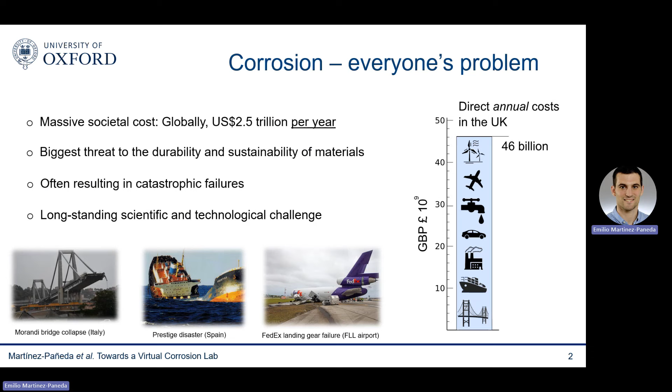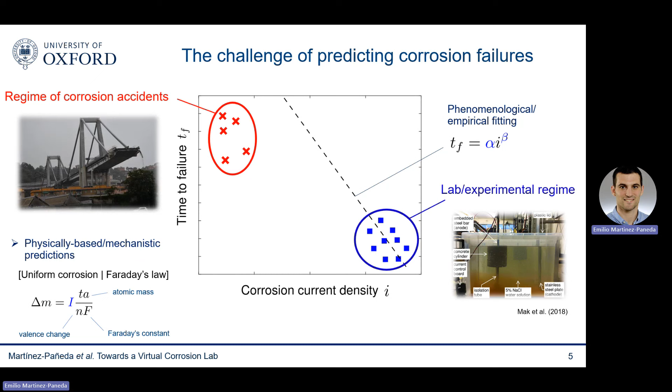So the main takeaway and philosophy here is that we want to be predictive, and if we want to be predictive, we need to move away from big assumptions and fitting parameters. We need to explicitly resolve the physical processes taking place. We need models that rely purely on physical parameters.

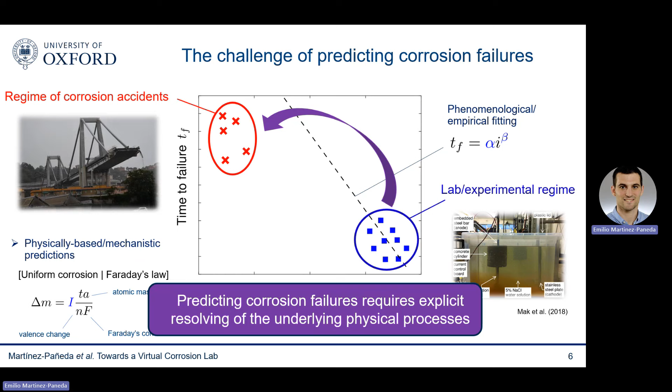This is, of course, not easy to do, as localized corrosion can be a very nasty business with many physical ingredients. In a typical stress corrosion cracking scenario, you have a metal containing a defect that is exposed to an electrolyte, or you have multiple ionic species that are moving around due to diffusion, fluid flow, electromigration.

In the interface between the metal and the electrolyte, you have chemical reactions, which might include material dissolution, the formation of a passive layer, the absorption of deleterious species, such as hydrogen. Then these hydrogen atoms move within the metal, which is deforming elastoplastically due to mechanical loading, which is also rupturing the repassivation layer, and so on.

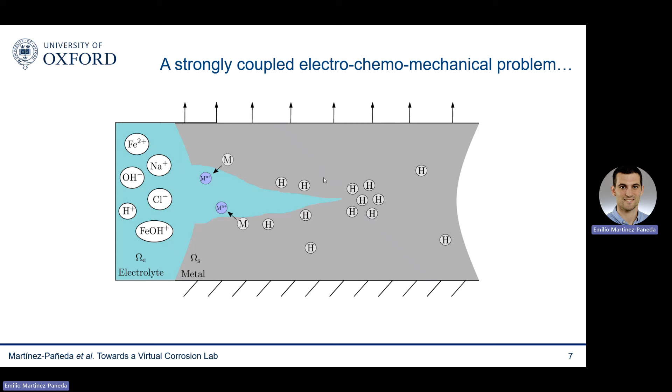So there are a lot of things happening, all of them important, and all of them strongly coupled. The good news is that we know what the differential equations are that describe each of these physical phenomena, and that we finally have enough computer power and multi-physics finite element tools to solve them.

So in a way, we can take advantage of the growth of computers and resolve the problem by brute force, explicitly resolving each of the physical processes involved. And this delivers a model that is physically based and relies only on physical parameters.

You can see it here, for example, the Nernst-Planck equation. The parameters involved are Faraday's constant, temperature, diffusivity.

Solving models with 10, 15 degrees of freedom per node was unthinkable when I started my PhD 10 years ago, but it's very doable now.

I won't get into the details of the computations for the sake of time, but there's significant work going on in the computational mechanics community to accelerate these calculations, in applications ranging from batteries to corrosion. For example, in our group, we have shown that using lumped integration schemes, we can accelerate by a factor of 1,000 some of these calculations relative to COMSOL, which is the typical commercial finite element package for this type of multiphysics simulation. So all of this is good news.

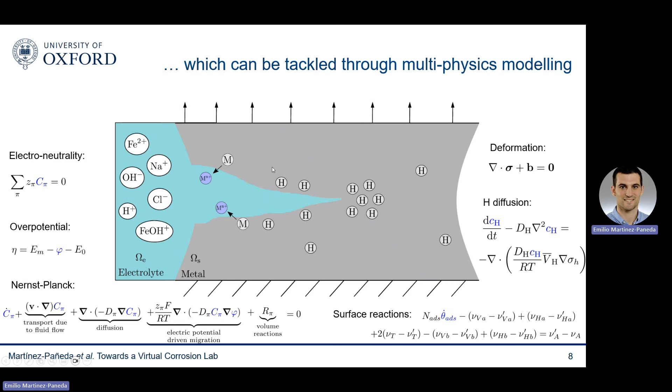Computers are big enough that we can resolve the physical phenomena as they happen in reality, but there's another challenge. In corrosion, defects are not stationary. The interface between the electrolyte and the metal is continuously evolving. You get pitting, a pit-to-crack transition, so you need to capture this. And this is going to be closely linked to everything that I showed you in the previous slide.

You can see it very nicely here with this example of corrosion fatigue in offshore wind turbines. Corrosion fatigue is what governs the lifetime of these offshore wind turbines, which is only 25 years. So you get an evolution of the pits, then those pits growing, and then eventually this kind of pit-to-crack transition and the propagation of fatigue cracks.

And everything is strongly coupled. The corrosion front evolves driven by local chemistry and mechanics, and the local chemistry and mechanics are themselves dependent on the corrosion front morphology. The stresses are larger ahead of sharper pits, and the pH drops in occluded electrochemistries, as you can see here. So this is the second big challenge, holding back the development of physical models.

You need to simulate the evolution of this interface, the corrosion front, and tracking the evolution of an evolving interface is a well-known mathematical and computational challenge.

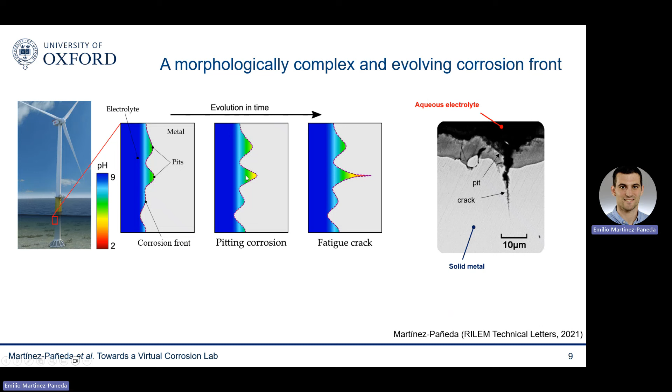Let me show you this. If we think of the simplest way to mathematically express corrosion, we could define a normalized concentration of metal ions, which is equal to 1 in the metal and 0 far away from the corrosion front deep into the electrolyte.

Then under conditions of activation-controlled corrosion, the evolution of the interface velocity is given by Faraday's second law, and the concentration of metal ions at the interface is given by the Rankine-Hugoniot condition.

And when the concentration of metal ions reaches the saturation value, then instead you have diffusion-controlled corrosion, so that the concentration of metal ions is given by this Dirichlet boundary condition, and the interface velocity is given by substituting the saturated concentration in the Rankine-Hugoniot condition.

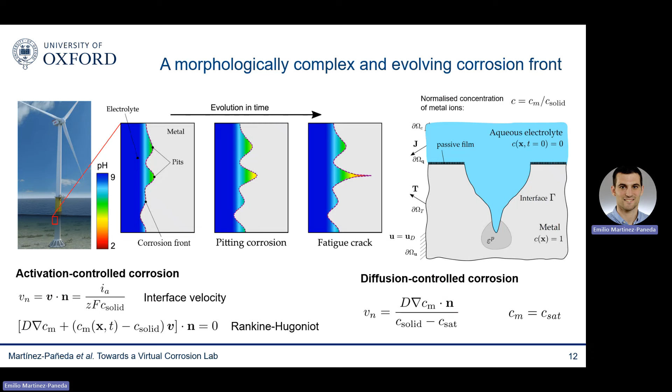So you have to impose on the moving corrosion front boundary conditions of various types, Robin, Dirichlet, that are varying in space and time. This is simply a computational nightmare, and the reason why computational mechanicians have not been able to deliver models to predict the evolution of corrosion.

However, the good news is that a new technique has been recently developed that enables tackling interfacial problems of arbitrary complexity. These are the so-called phase field models. The idea is quite simple.

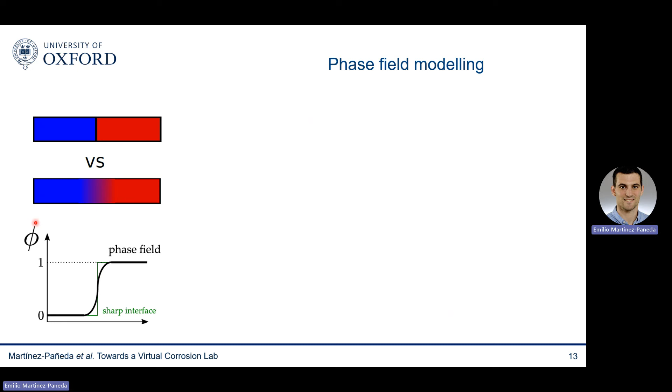Instead of describing the interface between two phases, such as aqueous electrolyte and metal, as sharp and discontinuous, you can smear that interface over a finite domain and use an auxiliary variable, the phase field, to describe where the interface lies. And then you just need to define a differential equation for the evolution of this phase field.

This implicit method of describing interfaces is computationally very powerful, and I'm listing here some of the key advantages. Essentially, you don't have to define those nasty moving boundary conditions. You can capture topological changes, such as the coalescence of multiple pits, in a natural way, and the method is ideal for coupled multiphysics problems.

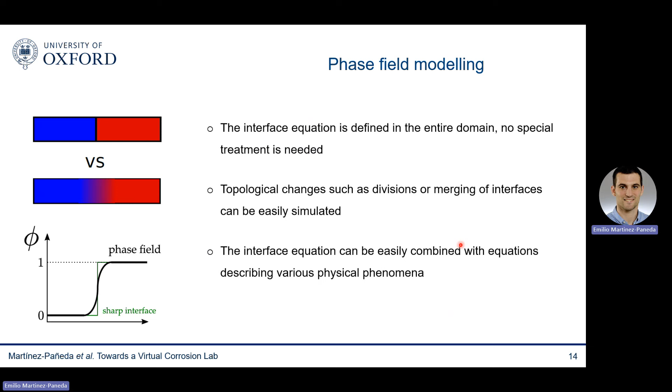In fact, phase field modeling has been a revolution in many areas of science and engineering. It all started in the condensed matter physics community, where it is now by far the most widely used technique to simulate solidification and microstructural evolution.

It has also very quickly become the dominant technique to simulate fractures, and you can see here why. Very complex cracking phenomena can be captured. This is the output of a simulation. You can see here crack branching, coalescence, nucleation of secondary cracks.

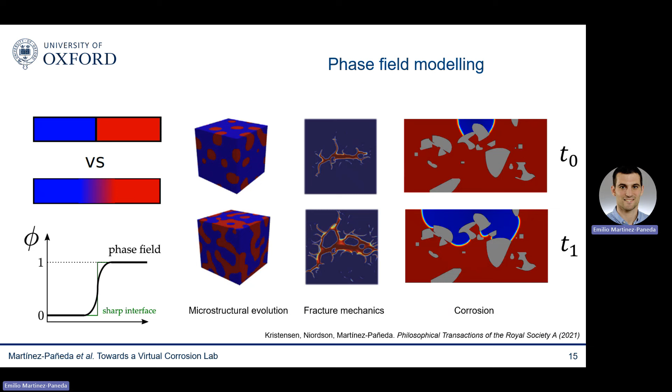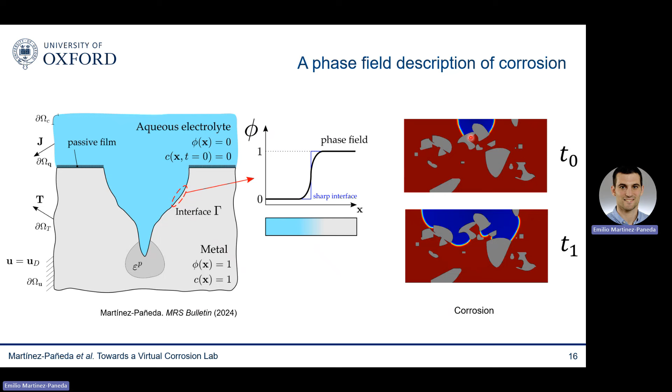We and other groups in the US and Asia have recently shown that this paradigm can also be extended to corrosion. The phase field can be used to describe the evolution of the electrolyte-metal interface, the corrosion front. So the phase field is going to act as a marker, and it's going to tell us where the corrosion front is, basically by taking a value of 0 in the electrolyte and a value of 1 inside of the metal. Throughout my talk, I will use blue color to denote electrolyte and red color to denote metal.

I'm going to skip all the mathematical details for the sake of time, but if anyone is interested, this is all derived from a free energy functional, so all is based on thermodynamics, and the constitutive choices are based on the so-called KKS, Kim-Kim-Suzuki model, which assumes thermodynamic equilibrium between the phases.

But basically, at the end of the day, what you end up with is two equations. One for the short-range interactions, that is corrosion, material dissolution, which is what you see here. This is basically the phase field equation, an Allen-Cahn type of equation. And then a second equation to describe the transport of the metal ions, which is a diffusion type equation.

I will not give details on the numerical implementation, but it is straightforward in any finite element code, and we openly share all our code so you can see it all there. The key thing that I want to emphasize is that the upper equation is governed by this mobility parameter L, and the bottom equation is governed by this diffusion coefficient D, and both have a clear physical meaning.

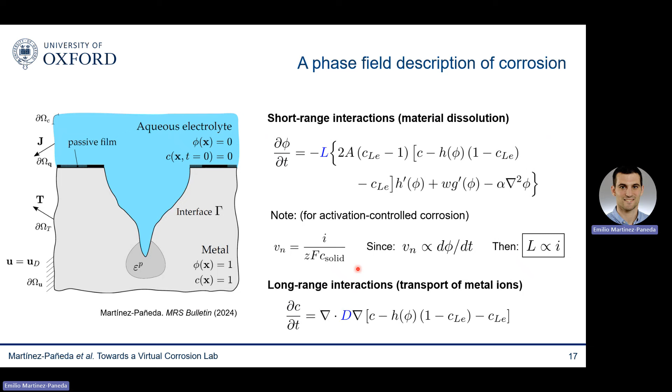The diffusion coefficient is obvious, and as you can see here, the mobility coefficient, you can easily demonstrate that it's proportional to the corrosion current density. So it's straightforward to quantify this value of L from a simple uniform corrosion experiment.

So let me show you how this works with the simplest example, the pencil electrode test, which is effectively 1D corrosion, as you have uniform corrosion of this metallic bar. You can see here some representative results.

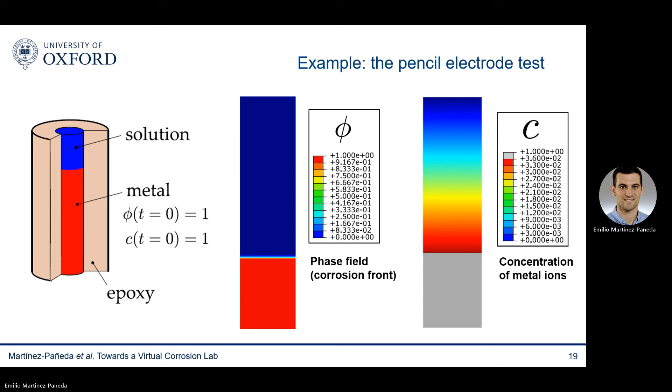On the left, the evolution of the corrosion front, as described by the phase field, and on the right, the evolution of the concentration of metal ions in the electrolyte. The good thing is that for this 1D problem and conditions of diffusion control corrosion, there's an analytical solution, so we can confirm that the model is giving us the right outputs, as you can see here.

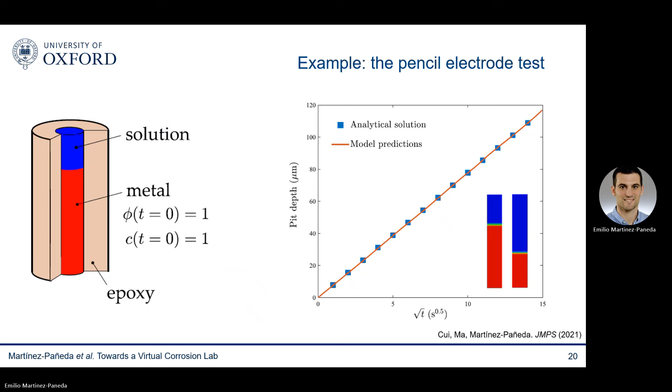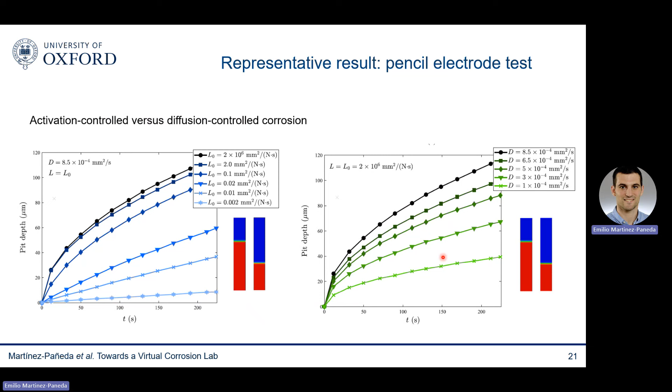But also important, we want to show that the model can capture naturally the transition from activation control corrosion to diffusion control corrosion. You can see here on the left that if we ramp up the corrosion current density through this L parameter, the mobility coefficient, we go from the linear behavior of activation control corrosion to the parabolic behavior of diffusion control corrosion. And of course, when we are in the diffusion control corrosion regime, then the pit depth is going to be very sensitive to our choice of diffusion coefficient.

So there's another key takeaway. You don't have to worry about going from activation to diffusion control corrosion, adding some sort of criteria that you need to change in time and space, because the model can naturally capture this.

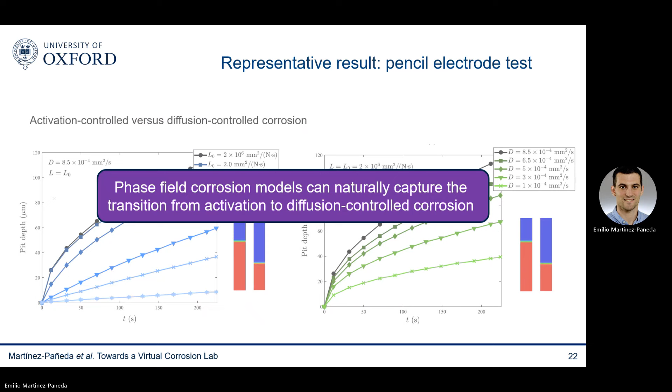But of course, we're not interested in simulating 1D problems, uniform corrosion. Our aim is to capture corrosion problems of arbitrary complexity. We want to simulate 2D and 3D problems, capture pit interactions, and predict the role of secondary phases, intergranular corrosion, and so on.

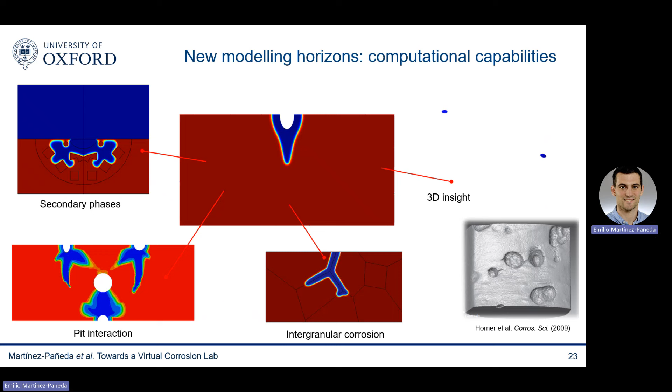This is one of the core strengths of this method. We're capable of doing all these things, and this allows us to bring complementary insight to the experiments we do in our labs, and also rationalize a number of observed phenomena, including some interesting synchrotron pit growth observations reported some years ago.

But even more important than these computational capabilities is the ability to resolve the underlying physics. As I said at the beginning, my friend claims that corrosion is too complex to be simulated with computers, and he might be right. There's many things happening, all playing a role and all coupled.

But all of that physical phenomena can be simulated in a computer nowadays. We can incorporate the role of electrochemistry, the role of microstructural anisotropy, the interplay with hydrogen ingress and embrittlement mechanisms, the coupling with mechanical fields, which can disrupt the passivation film and enhance corrosion kinetics, and the electric double layer and the formation of corrosion products, and others.

These are some of the avenues explored by our group, but what excites me about this emerging field is that there's so many possibilities ready to be explored. Corrosion is indeed a very rich and complicated problem, but we can finally incorporate all that richness, all that complexity, into our models.

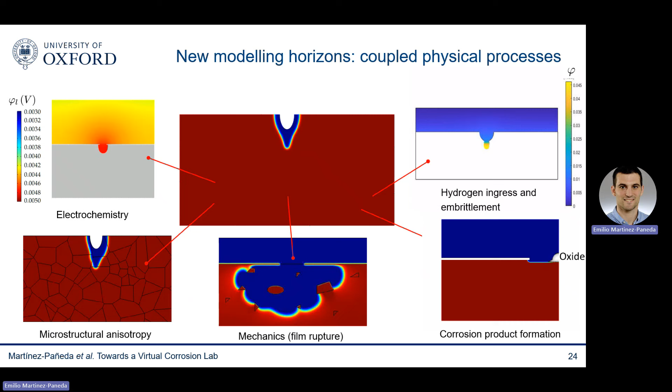So I'm just going to finish my talk with some examples of these applications. As a mechanician, the first ingredient that I was keen to add was the role of mechanics.

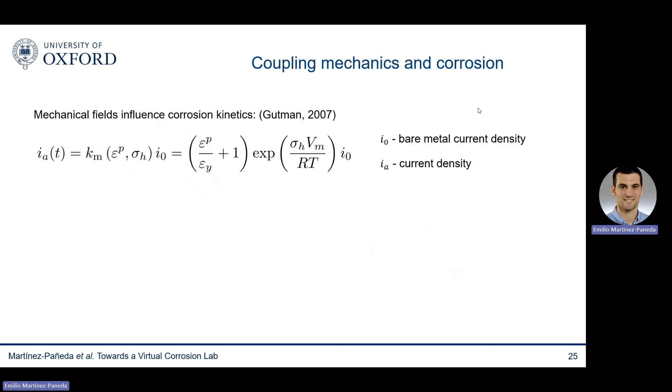And mechanics can impact corrosion in two ways. One is by enhancing corrosion kinetics, as nicely described by Gutman. As you can see here, the corrosion current density is enhanced by plastic straining and also by the hydrostatic stress.

And we can easily incorporate this into our model because the mobility coefficient, the L parameter, is proportional to the corrosion current density. So we solve the mechanical problem, as you do in any regular finite element code, and bring that information, those hydrostatic stresses and plastic strains, into L, which is no longer a constant.

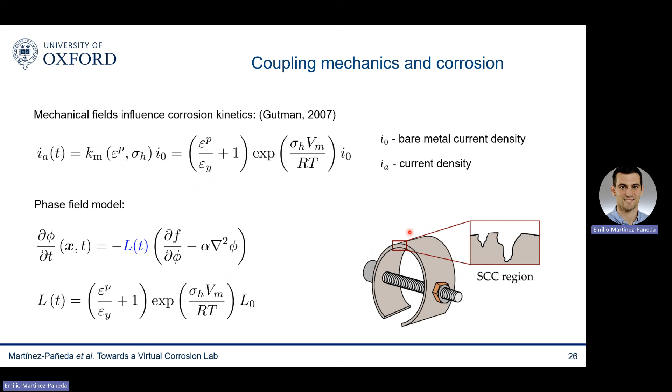And we will test the outputs of this model by comparing against C-ring experiments where you apply a constant load and measure the degree of corrosion.

Here you can see the results. As you can see, the model delivers an excellent agreement with experiments over two levels of applied load, for both the degree of corrosion and also for the morphology of the corrosion defect.

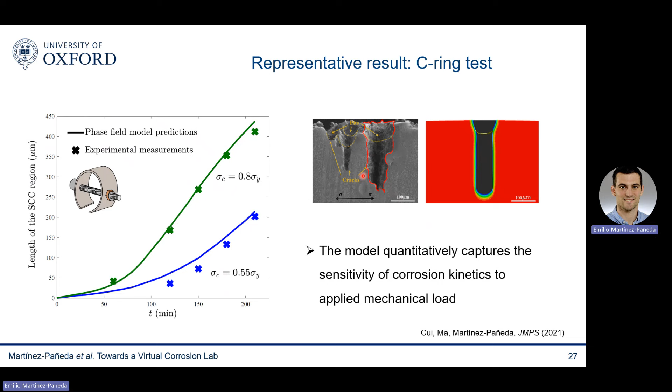You can see it here. These two figures have the same scale, and there are multiple pits here. We choose to model only the main pit. We could have modeled multiple pits, and you can see that there's a relatively good agreement.

The other way in which mechanics typically impacts corrosion is by disrupting the passive layer, of course. And as you know, this is a cyclic process. You form a passive layer, which is becoming more stable with time, so then you reduce the corrosion potency.

But then when your strains are large enough, you fracture the passivation layer, and that leads to a sharp increase in corrosion current density.

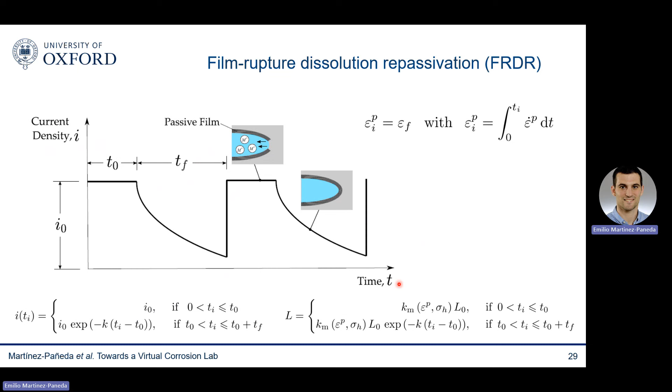And again, this is straightforward to incorporate into our model because we are solving a mechanical problem, so we know when the strains are large enough to cause film rupture. And exploiting the relationship between this mobility coefficient and the corrosion current density, we can again enrich the definition of this L coefficient to incorporate this film rupture dissolution repassivation mechanism.

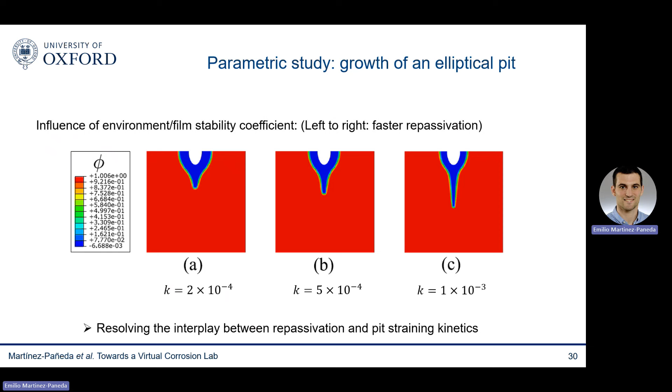When you do that, you can run simulations that resolve the interplay between the straining kinetics and repassivation kinetics. Among other things, you are able to predict naturally the pit-to-crack transition, which is something the community has been trying to do for decades.

Another important physical ingredient is the role of microstructure. We know that not only do we have an anisotropy in the mechanical behavior due to the anisotropy of the crystal properties, but also corrosion rates are sensitive to the crystallographic anisotropy.

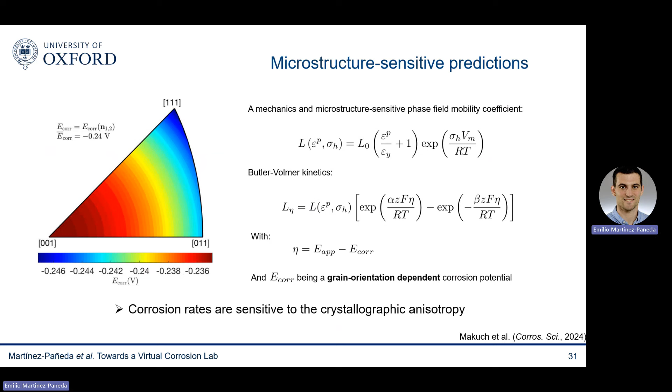So we take experimental data for different crystal orientations and define grain orientation dependent corrosion potential. And then there's many things that you can do with this microstructural enriched model. For example, you could combine it with EBSD images to look at real microstructures.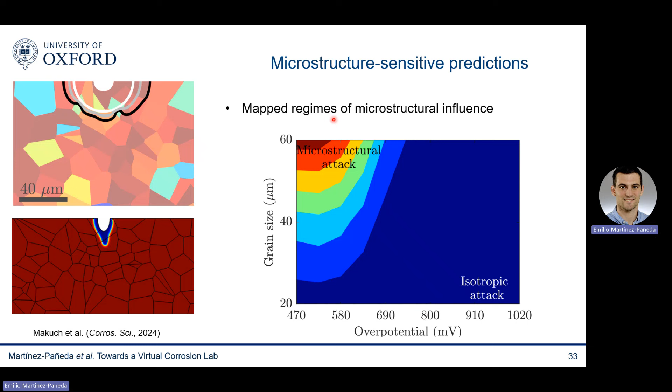In our case, what we did is learn these things: one is to map the regimes where microstructure matters. When do you need a full microstructure analysis? Here you can see the type of results we can get. You can build maps where you have grain size on the vertical axis and overpotential on the x-axis, and quantify under which conditions you can get away with a simpler model and under which conditions you need to resolve the role of the microstructure.

We can also learn about the interplay between corrosion anisotropy, mechanical anisotropy, and grain size effects. And we have also shed light into the different corrosion susceptibility of additively manufactured alloys.

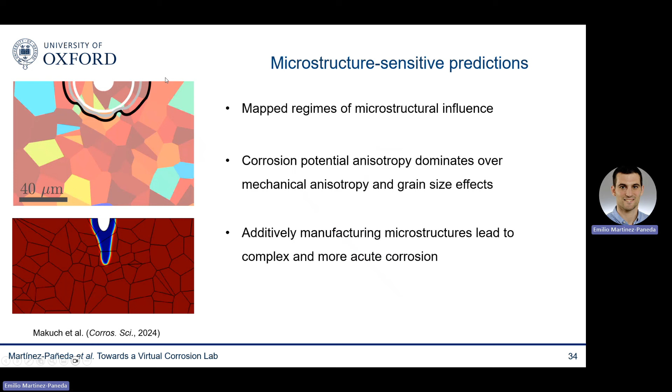Another key ingredient is electrochemistry. We can fully resolve the electrochemical behavior of the electrolyte and capture how it impacts corrosion through changes in conductivity. The model is getting bigger, but computers nowadays can handle this. All the new physics incorporated into this model relies purely on physical parameters. There are no mysterious fitting coefficients nor any strong assumptions.

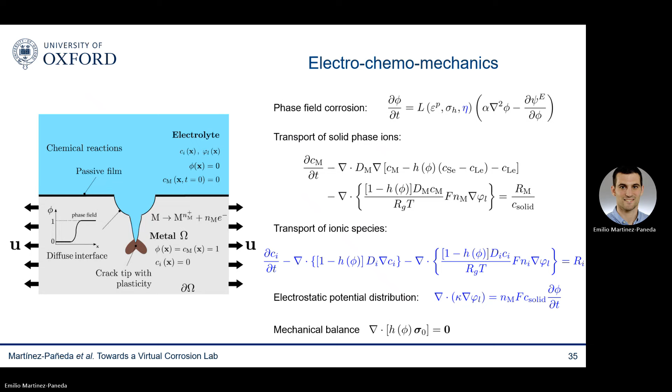All the mesoscale physics is being resolved. And when you do that, you can capture the role of solvent concentration, of applied potential, and see how the electrochemistry of the electrolyte evolves in time with changes in the corrosion front.

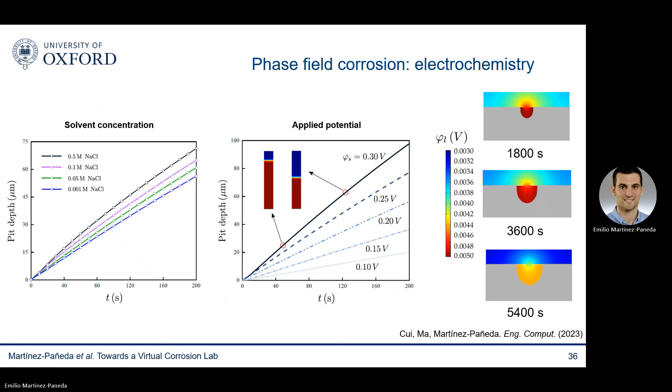One of the last applications I want to discuss, and this is one of my favorites, is what I like to call biocorrosion: predicting the corrosion of biodegradable materials in body fluid. There's significant interest in using magnesium for implants, so you have a non-permanent implant that will degrade as the bone or tissue heals, as you can see here. However, the issue with magnesium is that it corrodes too fast in body fluid, so people are trying different solutions such as alloying or composites.

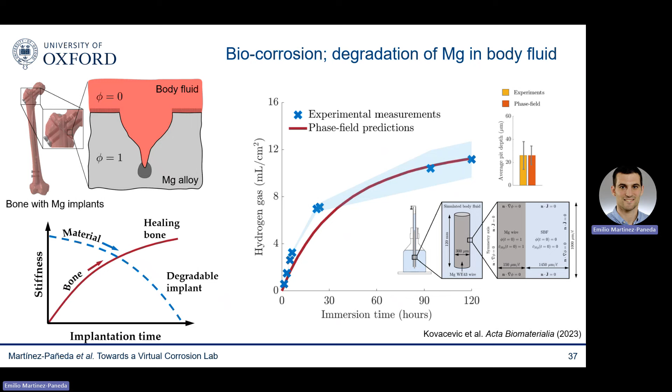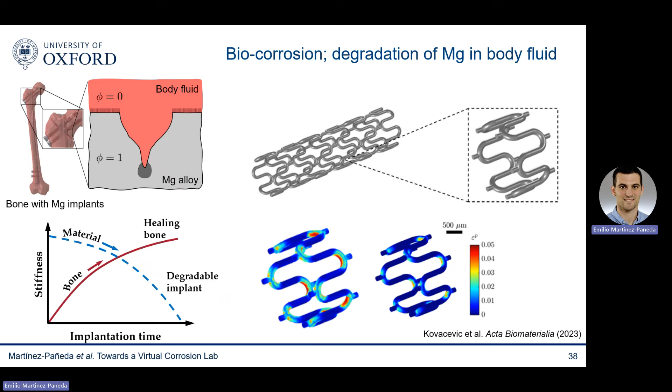This is a slow experimental trial and error process, so we have extended our models to handle this application with the hope we can accelerate the discovery of suitable biodegradable implants. As you can see, we get good agreement with experiments. Importantly, we can simulate the behavior of implants and stents in vivo as they would be in the human body. We cannot do experiments in humans, so the ability of models to go from in vitro benchmarking to in vivo predictions is important.

We've also combined this type of phase field models with... let me say one thing first. All the simulations I showed you so far, as we typically do in our lab, and as you do with finite element simulations in commercial codes like COMSOL, assume that you are imposing an applied potential.

However, under natural corrosion conditions, you don't have such a condition, right? You don't have any applied potential in your metal. But we can develop models where the metal potential is a degree of freedom, an output of the model, where we don't impose any constraints, and we can simulate corrosion under natural charge conservation conditions.

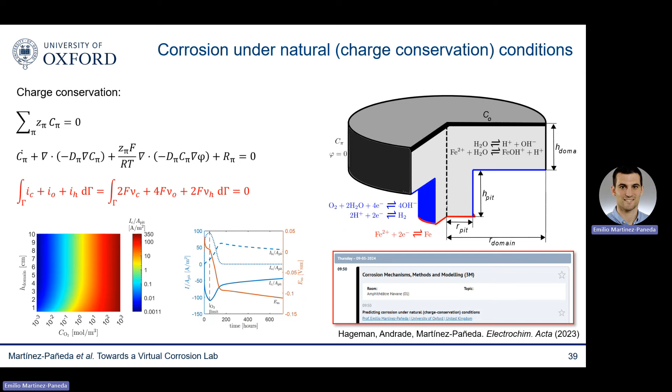This is what you see here. You can define this charge conservation condition. We have tried to use these techniques, particularly in collaboration with Carmen Andrade, to focus on understanding corrosion in reinforced concrete structures, to map the conditions and understand questions related, for example, to the amount of oxygen needed, how long corrosion can be sustained in the absence of high oxygen, and where anodic and cathodic reactions will happen. You don't need to prescribe that in the model—the model will give you that answer.

This allows us, when predicting corrosion-induced cracking, to combine these models with those phase field fracture models that I showed you before. Then we can use these models to predict not only those accelerated corrosion tests I showed you at the beginning, but also run simulations over timescales of decades and predict corrosion of reinforced concrete structures under natural charge-conserved corrosion conditions. So we can go from fast tests to real-scale applications.

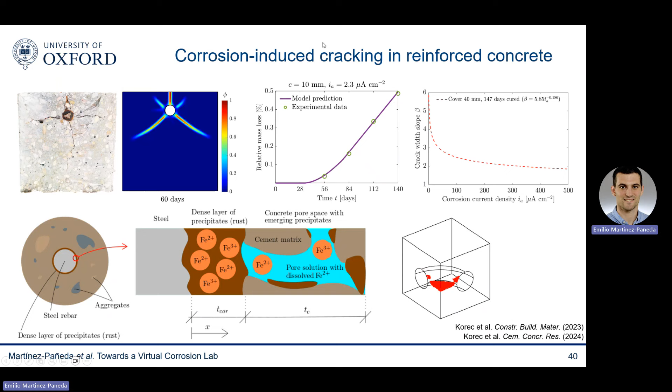We've also incorporated the role of the electric double layer with a suitable definition of an equivalent circuit model. I don't have time to discuss this, but this was presented by my PhD student, Maciek.

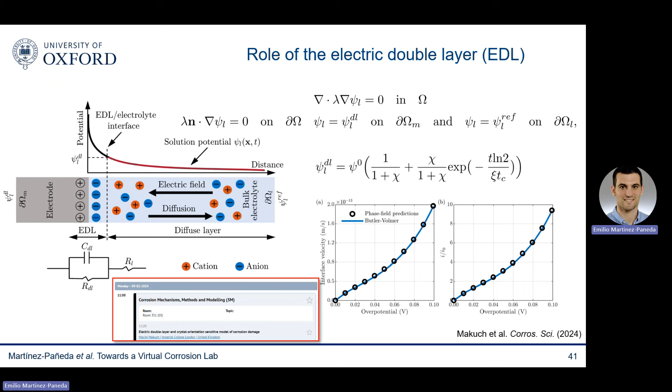We have also combined this class of models with hydrogen embrittlement models. We're becoming greedy now, and we want to simulate everything, but why not? In this way, we can present a generalized model for stress corrosion cracking, where we don't need to make any assumptions on whether damage is anodic dissolution driven or hydrogen driven. We simulate everything that is happening and let the model decide, let the model pick the mechanism.

So all the electrochemomechanical machinery that we had before, we now add a second phase field to describe the behavior of cracks. We predict the uptake of hydrogen to the metal by adding to our electrochemistry model the hydrogen evolution and absorption reactions. And we model the transport of hydrogen within the metal and the embrittlement process, the fracture of the metal due to hydrogen.

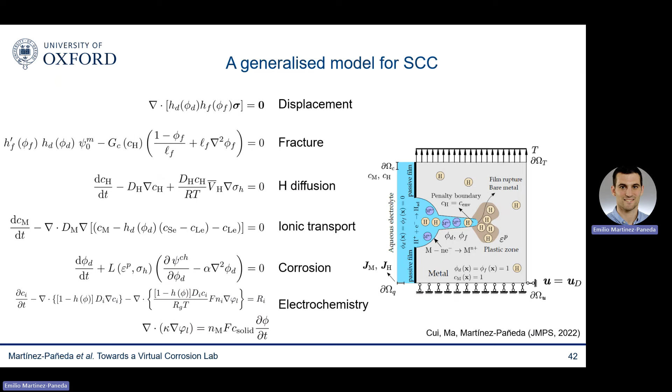In this way, we can predict stress corrosion cracking for any choice of environment. And we can see the pit-to-crack transition and how changes in corrosion front geometry lead to different electrochemical behavior and hydrogen uptake conditions.

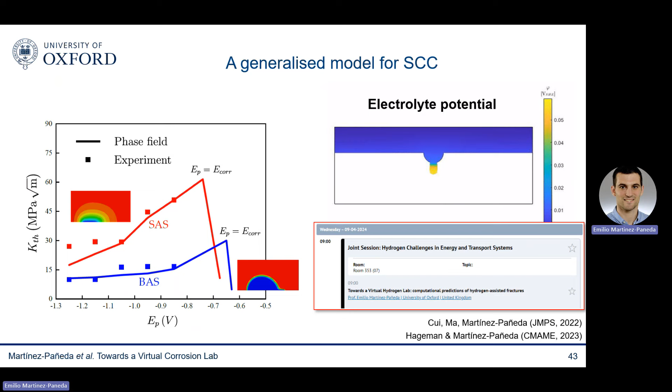I discussed this more at length in the EUROCORR meeting through a talk that I gave. I was more focused on gaseous environments and on using this kind of mechanistic model to predict under which conditions we can transport hydrogen safely in natural gas pipeline infrastructure. This is a talk that also gained significant attention, so I decided to record it and upload it to YouTube. You can find it somewhere in my channel.

So let me just finish with a few concluding remarks. The first one is that I feel this is a very exciting time because the combination of two recent developments, multiphysics and phase field modeling, enables us to fully resolve the physics of corrosion. So we can put forward a framework that does not need big assumptions or fitting parameters. Quite the opposite, it relies only on physical properties that can be independently measured. We don't fit the parameters to predict the experiment. We know the value of the parameters before running the simulation.

Another strong point is that this is a very flexible framework that can easily be extended in multiple directions, and it has no computational limitations. You can simulate problems in 2D and 3D with multiple pits interacting, intergranular corrosion, secondary particles, whatever you have in mind.

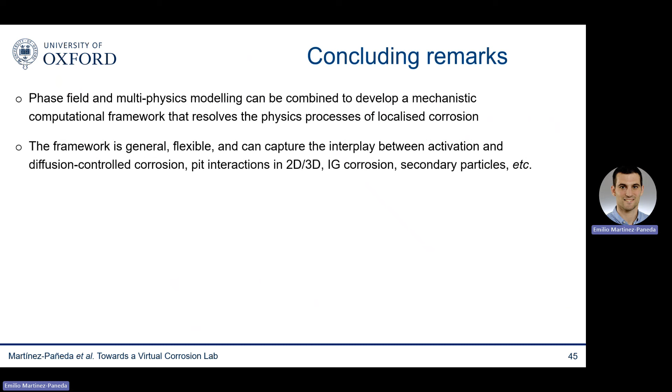Additionally, we have tried to contribute to this community and capture the richness of corrosion by extending the framework in multiple directions. I provided some examples, listing some of them here. I think what is exciting is that, as I said, corrosion is a complex and rich problem, but we finally have the tools to incorporate the richness and physical complexity into our models.

So we don't need to make assumptions. We can solve things from mesoscale first principles, so to say. I will try to incorporate what we think are interesting physical ingredients, but I'm sure that many of you have other ideas in mind. You may want to use these models to answer other questions that we haven't even touched. Corrosion has too many questions to be answered by one group.

So the possibilities are immense, and I feel very lucky to work in this exciting field. These are very early days, but I can see this growing already quite significantly and quite quickly. I'm sure there are many things to polish, but again, this is a very exciting area, and I think it's ready for you guys to jump in.

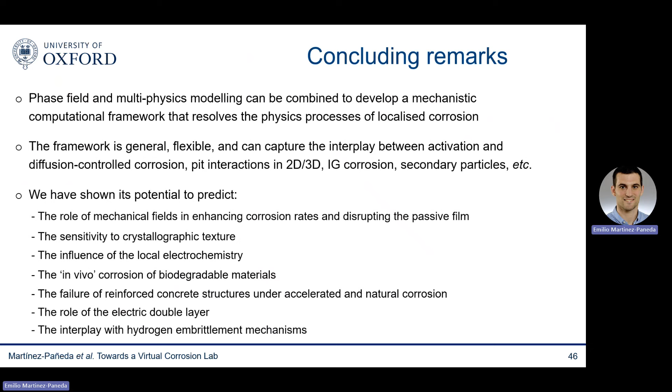To facilitate that, we have released openly all our codes. Some of these were developed as in-house codes in C++ or MATLAB. Many others were implemented in commercial finite element packages like COMSOL. So you're welcome to download them from the website, and you can reproduce all the results that I've shown you today.